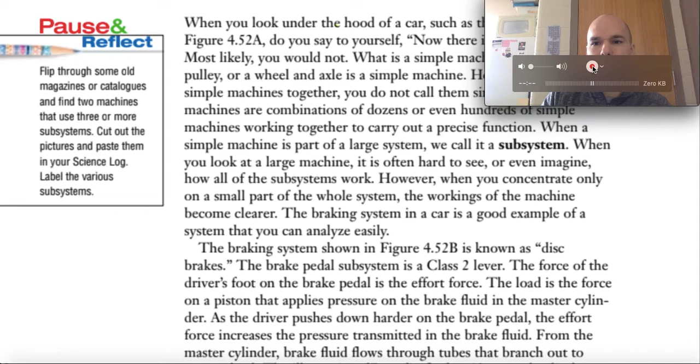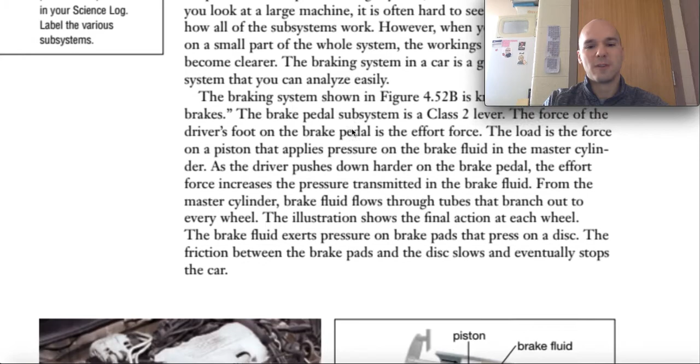Hey y'all, I'm just going to do a little read through there of the guided note taking. So if you wanted to follow along and listen to me read it, that's totally fine. Let me go here to page 326 because that is where the guided note taking begins. And we are there.

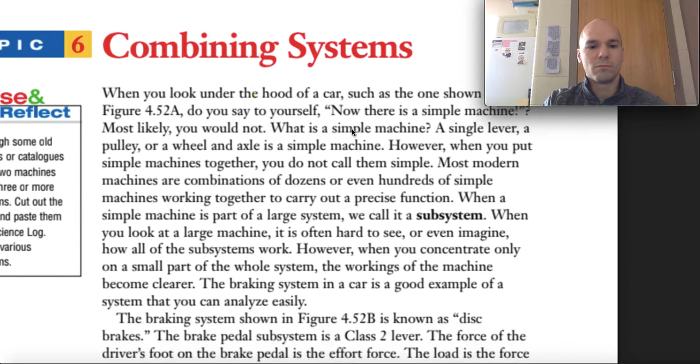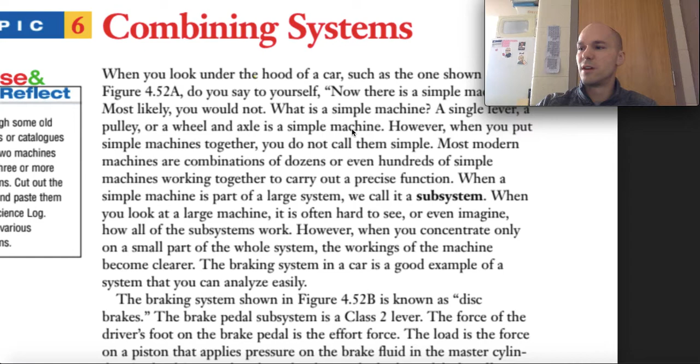All right. What is a simple machine? A single lever, a pulley, or a wheel and axle is a simple machine. However, when you put simple machines together, you do not call them simple. Most modern machines are combinations of dozens or even hundreds of simple machines working together to carry out a precise function. When a simple machine is part of a large system, we call it a subsystem.

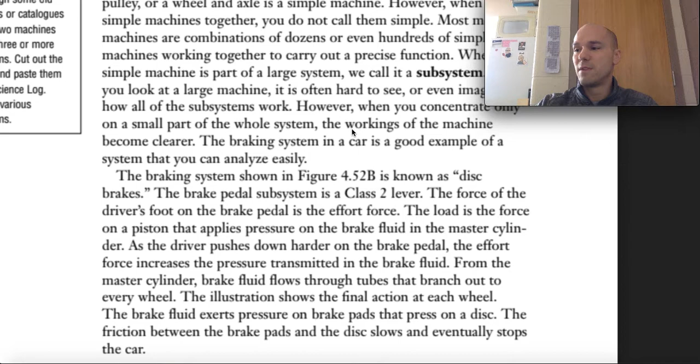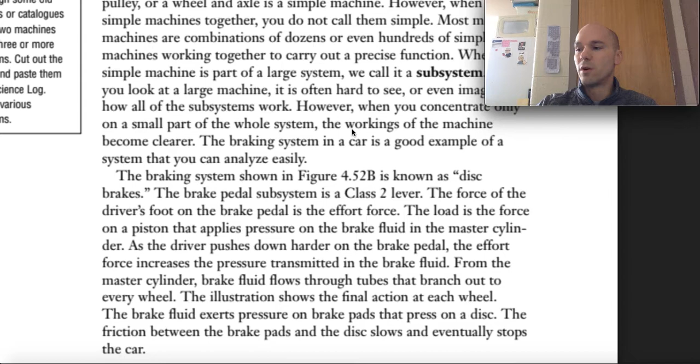When you look at a large machine, it is often hard to see or even imagine how all of the subsystems work. However, when you concentrate only on a small part of the whole system, the workings of the machine become clearer. The braking system in a car is a good example of a system that you can analyze easily.

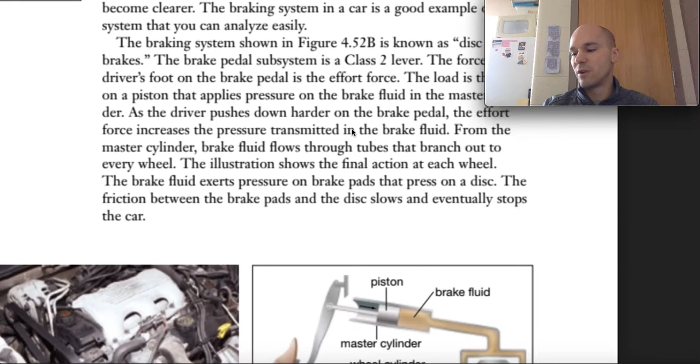The braking system shown above is known as disc brakes. The brake pedal subsystem is a Class II lever. The force of the driver's foot on the brake pedal is the effort force. The load is the force on a piston that applies pressure on the brake fluid in the master cylinder.

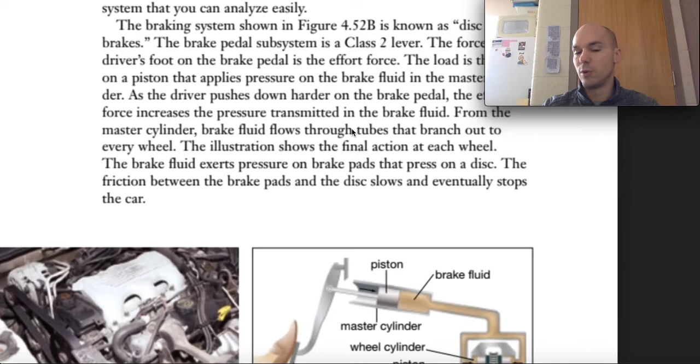As the driver pushes down harder on the brake pedal, the effort force increases the pressure transmitted in the brake fluid. From the master cylinder, brake fluid flows through tubes that branch out to every wheel. The illustration shows the final action at each wheel. The brake fluid exerts pressure on the brake pads that press on a disc. The friction between the brake pads and the disc slows and eventually stops the car.

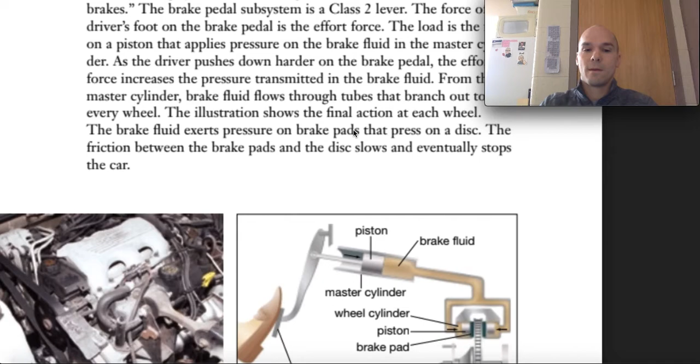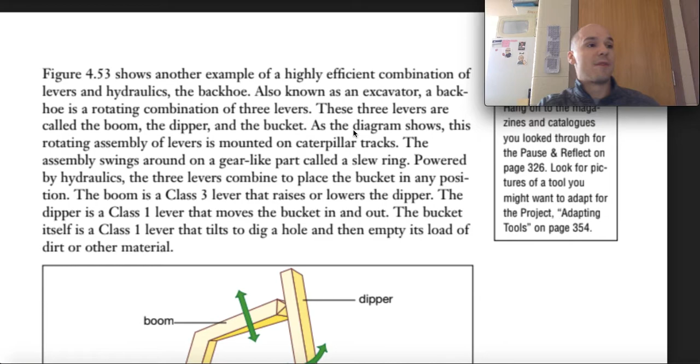We're going to go ahead now here. There's an image of it on your notes as well. We're going to go ahead here to 327, the backhoe, page 327. The above figure shows another example of a highly efficient combination of levers and hydraulics, the backhoe. Also known as an excavator, a backhoe is a rotating combination of three levers. These three levers are called the boom, the dipper, and the bucket.

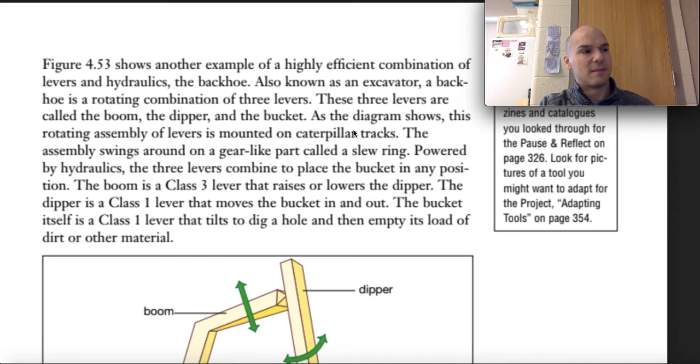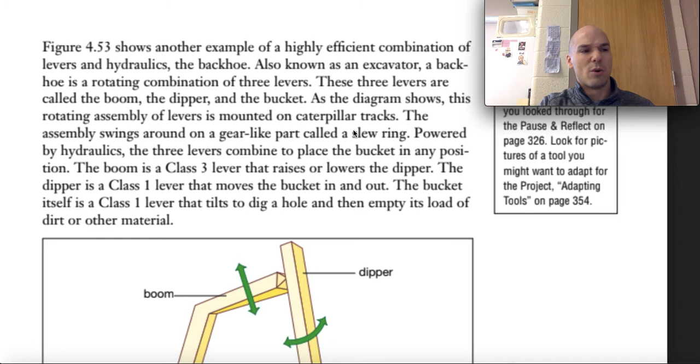As the diagram shows, this rotating assembly of levers is mounted on caterpillar tracks. The assembly swings around on a gear-like part called a slew ring. Powered by hydraulics, the three levers combine to place the bucket in any position. The boom is a Class III lever that raises or lowers the dipper. The dipper is a Class I lever that moves the bucket in and out. The bucket itself is a Class I lever that tilts to dig a hole and then empty its load of dirt or other material.

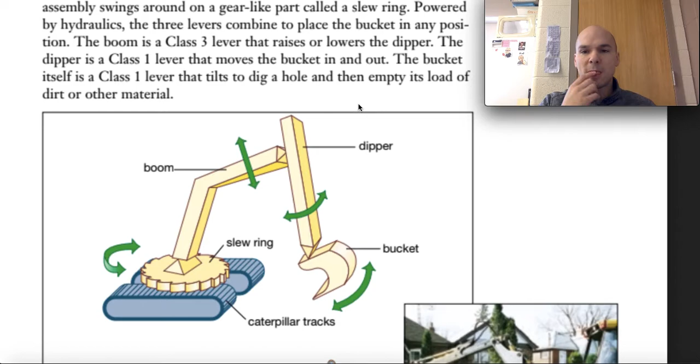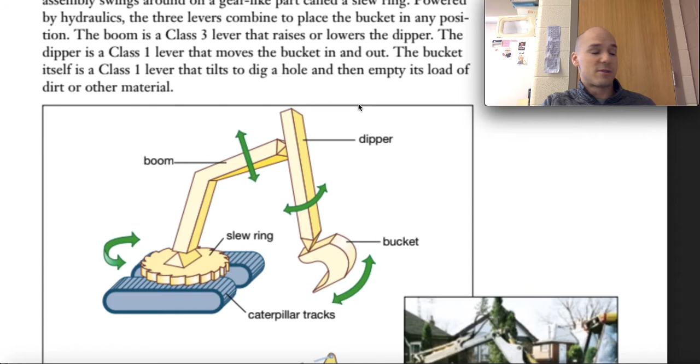So that's it really for topic 6. It's a quick one. On your notes, there are some points to ponder. Make sure that you go through those and you know how to answer those. And yeah, that's it. So quick one. Not much here in topic 6.